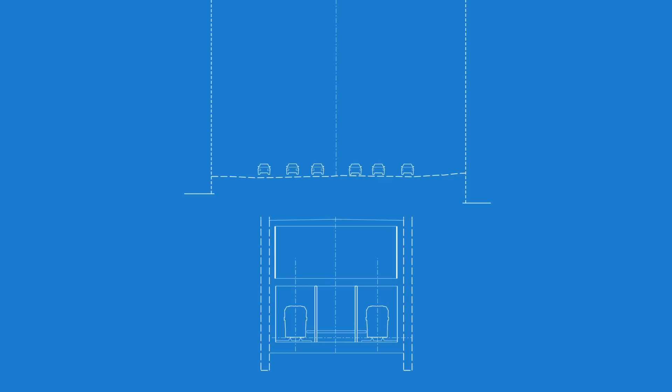When we build grade-separated rail in this city, Metro does essentially one thing: dual-bored tunnels with excavated stations multiple stories underground. They set these guidelines in the early to mid-80s, before I was even born, and they're still by and large using them today, with almost no deviation except where strictly necessary.

The problem is, this is a very expensive way to dig tunnels, and it's only getting more expensive. Meanwhile, there are two far, far cheaper ways to build grade-separated rail.

One, of course, is elevated, which we've occasionally built within dedicated right-of-ways, but can't seem to convince anyone in the city to let us build over streets, a continuing conundrum that I'll continue to discuss.

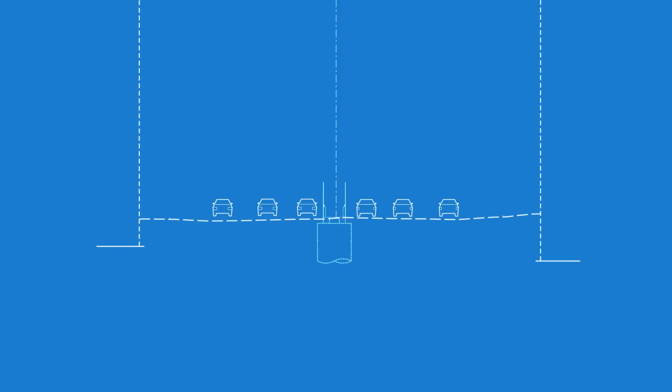But the other is cut and cover. Cut and cover is just what it sounds like. You dig out a tunnel and you cover it up. This is how basically all original subway lines were built. It creates a much shallower line, sometimes immediately below street level, and is absurdly cheap compared to our current methodology.

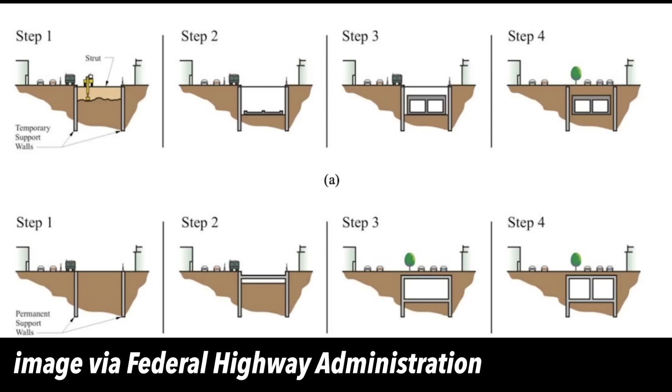So why don't we use it? I spoke to experts to get a better sense of things. There's three factors there. I think there's an institutional bias towards a high technology solution.

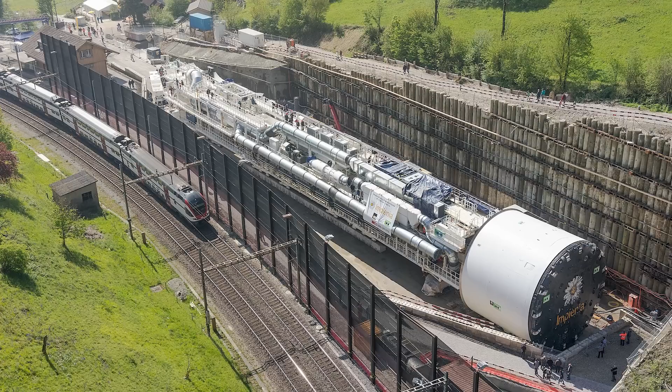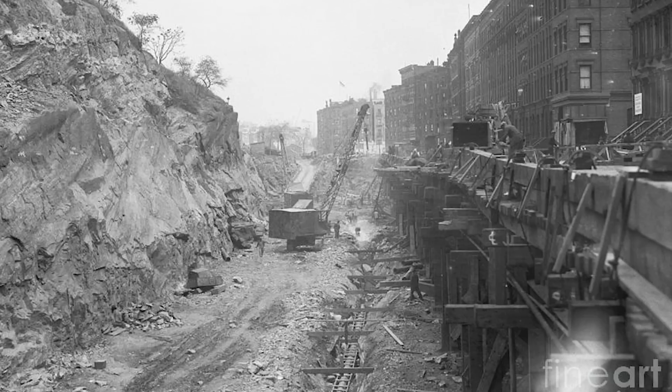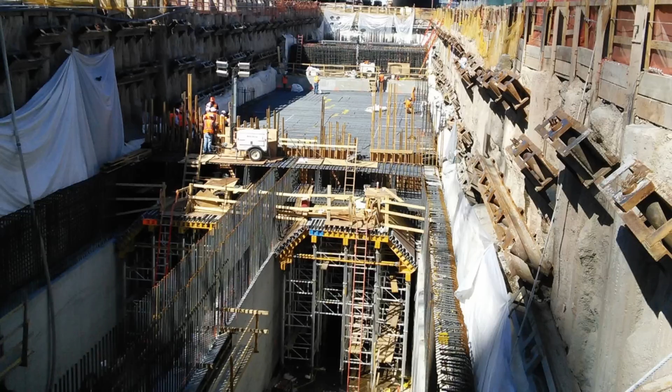TBMs are hugely impressive machines, and there's a bias against cut and cover as being the old technology. You get those photos when they were doing like the New York subway where it's chaos, and that isn't modern cut and cover. So there's a historical bias, and there's a lack of appetite of politicians to even broach the idea of disruption. That politics point is the really big reason.

Cut and cover requires closing the streets that you're digging under during construction, at least until it's excavated enough that you can deck over the tunnel and the street can be restored. And that leads to pissed off people.

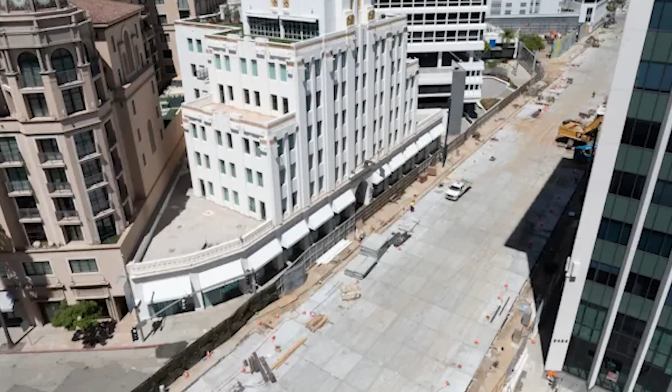It's also best on lines that entirely or mostly follow streets, as when you go off street, you need to acquire and knock down any structures it passes under to cut and cover the line.

This got me thinking about what current projects in Metro's list could be pushed as good proofs of concept that could finally convince Metro to shift from the old ways and embrace something new, or rather, even older, for the cost savings.

And well, we need to start with the mostly grade-separated projects, so the East San Fernando Valley Line and Southeast Gateway lines are out. The South Bay extension is on its own right-of-way and is already grade-separated cheaply with aerial and overcrossings.

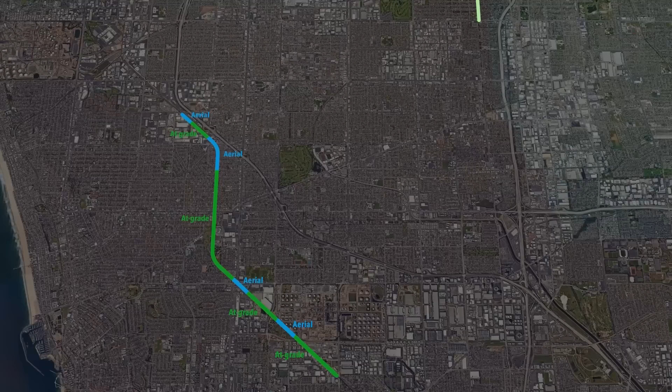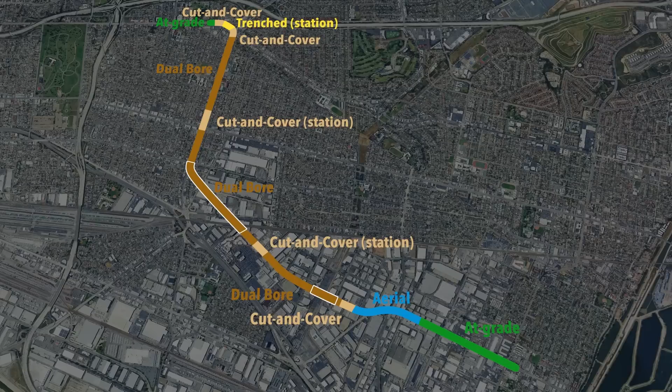The East Side extension, using the chosen route, kind of needs to travel off-street in two areas, and if you're launching a tunnel boring machine or TBM for those parts, you're left with a pretty small part of the route to alter.

Sepulveda, of course, should be elevated in the valley with Alternative 4, and that remains an ongoing battle.

Vermont Rail? Yeah, actually, that would be perfect for both cut and cover and elevated, north and south of Gage, respectively. Trouble is, this A isn't a Measure M project and thus is wholly unfunded.

And B, using one of the least wealthy parts of town as a test case for a slightly more disruptive technology understandably becomes untenable. So, what even remotely near-term projects are left?

Well, there is, of course, Crenshaw North. Phase 1 of the K Northern Extension makes sense to bore because it ideally goes off street grid for a while, saving a lot of time, even though Lafayette Square wants to reverse that.

But phases 2 and 3? It seemed crazy at first. There's multiple 90-degree turns that, as designed now, go under a lot of properties off street.

Phase 2 begins extremely deep under the D line, and then later has to be able to at least cross the B line if you want a future extension, and you're in an extremely busy and pretty wealthy area that will probably riot when it comes to street closures.

I should know, I live in this area. But that also kind of makes it perfect in a way. If we can do it here first, in a wealthy, dense area, that proves we can do it anywhere.

So I started futzing around, and I realized that logistically, not only was this actually not bad, it was actually pretty good. Even better, the impacts wouldn't be nearly as bad as I first expected. In most places, you can keep 2 travel lanes open in each direction on streets during almost all of construction. And as I dug into it more, pun mildly intended, I got more excited about it. Then I started researching and talking to experts to make sure I wasn't totally off my rocker. So here it is, my proposal.

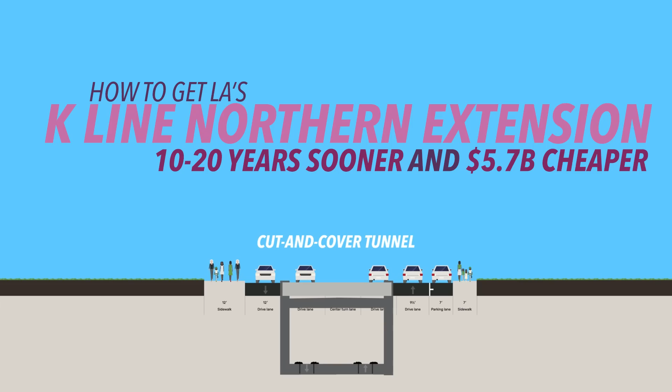Let's start at the end of phase 1. We have this extremely deep K-Line station under the D-Line's Wilshire-Fairfax station box. It adds a crossover at that depth, insanely expensive, but it would be necessary at the end of a phase, along with boring tail tracks at the end so the trains can use that crossover.

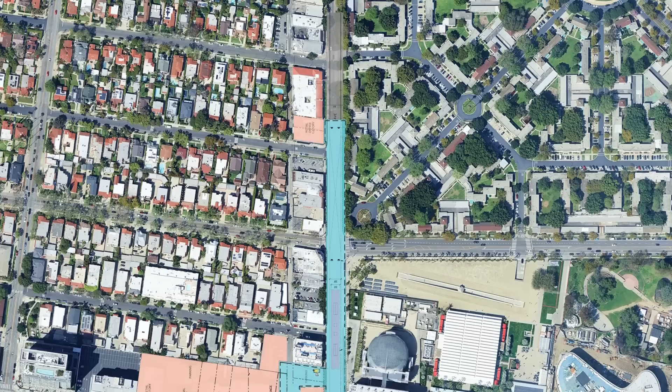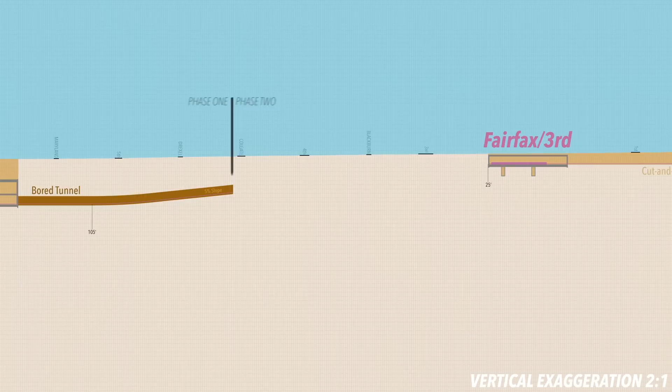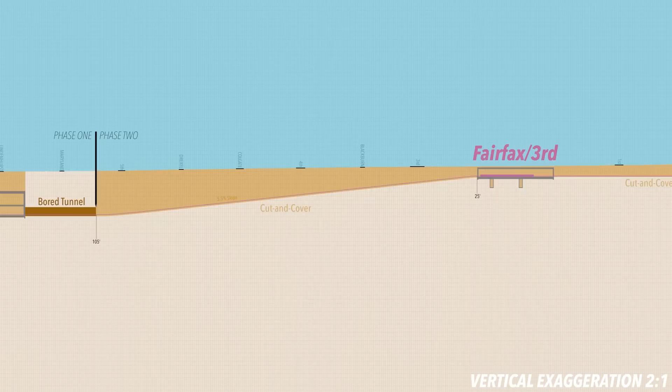So we begin with the need to bring these tracks from about 105 feet depth to something like 25 feet depth. There are two ways to do this. One, you can extend the end of phase 1 to 3rd Street and bore the tunnels up until we're near the surface, extracting the tunnel boring machines on the Whole Foods site that Metro is already planning to acquire for staging. Or you can end phase 1 at the tail tracks and construct the slope via cut and cover. We're already doing a giant cut and cover at the site for Wilshire-Fairfax Station at a greater width, so it's extremely feasible. The question is only which is cheaper.

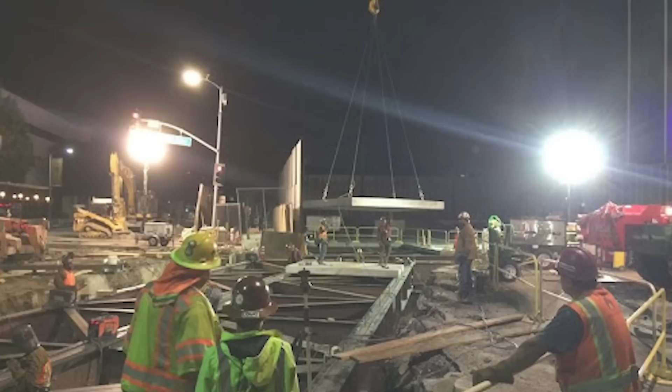The upside with cut and cover the whole way is I don't think you'd actually need the Whole Foods site at all. The reason Metro has it in their EIR as an acquisition is because of staging, and boring requires much larger staging areas than cut and cover, which leads to one of the first major cost reduction areas: you don't need to acquire these massive, insanely expensive properties for staging and TBM launch or extraction. So because of this, I'm assuming cut and cover all the way would be cheaper.

But either way, I'm siting the Fairfax 3rd station further north than the EIR does for 3 reasons. One, it allows more space to gently slope the tracks upward since we're ending at a shallower depth. Two, you'll see momentarily that the wider curve in the EIR's version, combined with its crossover, is what restricts it from moving further north, and our curve will start later, with the crossover frankly optional. And three, it will provide easier access to the forthcoming Television City development on the corner of Fairfax and Beverly.

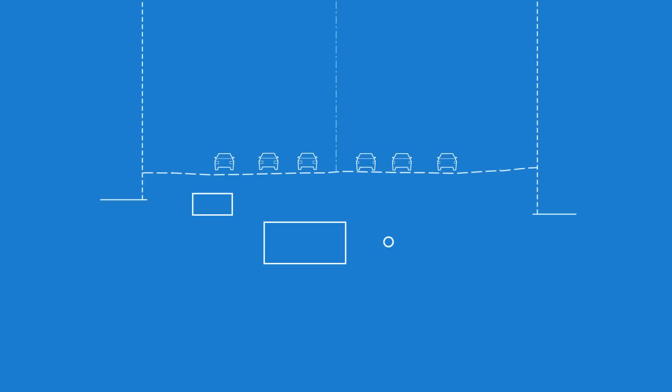So with that in mind, let's look at my potential station plan. I am keeping this as shallow as possible, a single level beneath the street, to make it as cheap as possible, meaning side platform stations. Yes, despite needing more utility relocation, it's still much cheaper than what we'd spend boring the tunnels, and it is very feasible. You do not need mezzanines. We use mezzanines in America uniquely to a high degree, and our fixation on mezzanines hugely increases costs.

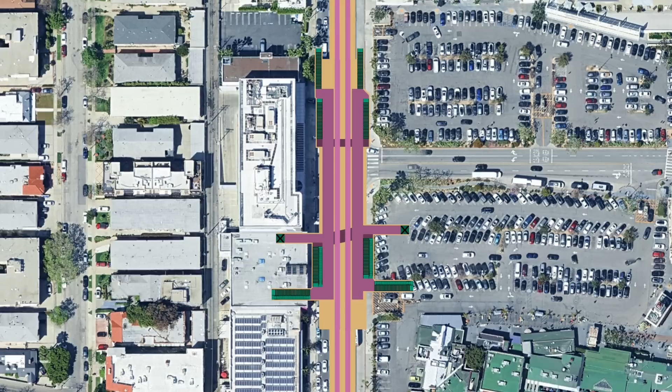While avoiding mezzanines, we do of course still want cross-platform access, and step-free access at that, within the station without needing to cross the road above. So each station will also have 1 or 2 small passages below the tracks to facilitate that, meaning we're only digging further than one level in these tiny areas rather than the whole area. Side platforms also mean, to make sure you don't have to use those cross passages going down and up again to access one platform, you at least want one entrance on either side of the street.

So in this case, I'm taking one extra property to enable that, and having the other main entrance at the farmer's market parking lot, which was already an option in the EIR version.

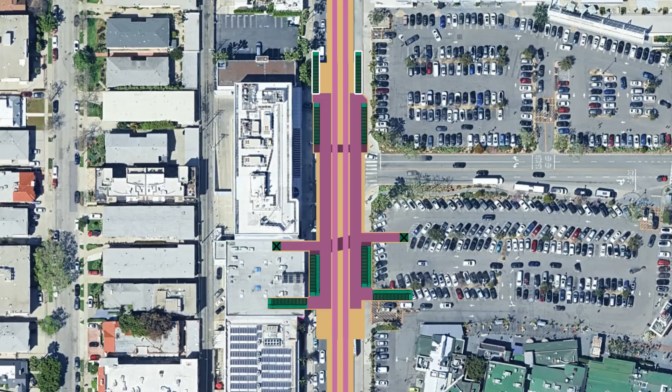These 2 elevators stop at surface level, platform level, and cross passage level, allowing full step-free access at each. I also have 2 further revenue entrances to the north to help facilitate Television City access. These are single stair entrances only, and the current turn lanes on Fairfax will simply be shortened.

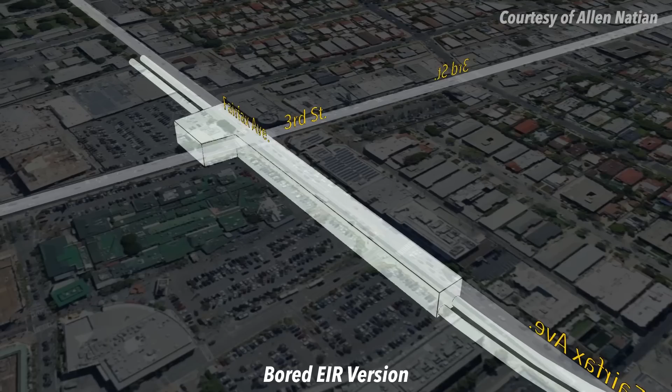And it's here that I want to discuss just how much simpler this is to build than the EIR version. Look at these respective 3D models of the station. Even with bored tunnels, the stations are built cut and cover, and there's 8 times the volume to excavate in

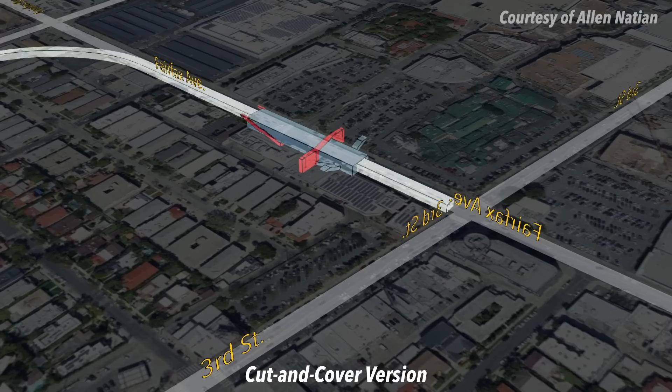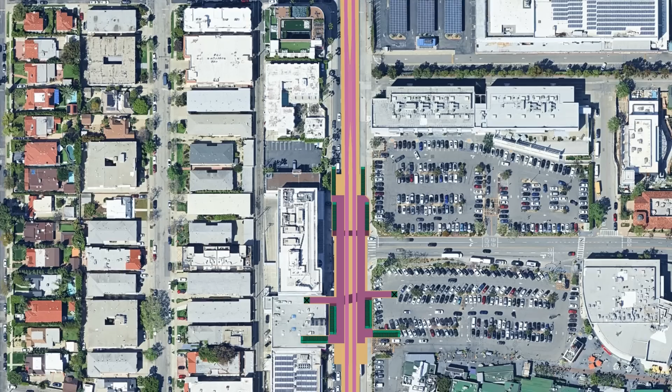the EIR version than in our cut and cover version. 8 times. So impact-wise, this street will be disrupted for significantly less time in our cut and cover version than the EIR version. Further, crossovers don't need their own station box extensions spanning the width of the street like they do in the EIR's deep bore version, and they can be added almost anywhere in the tunnels, further massively reducing surface disruption. But what about those tunnels?

The main downside of cut and cover politically is the street disruption outside of the station areas. Well, our roads in LA tend to be pretty wide.

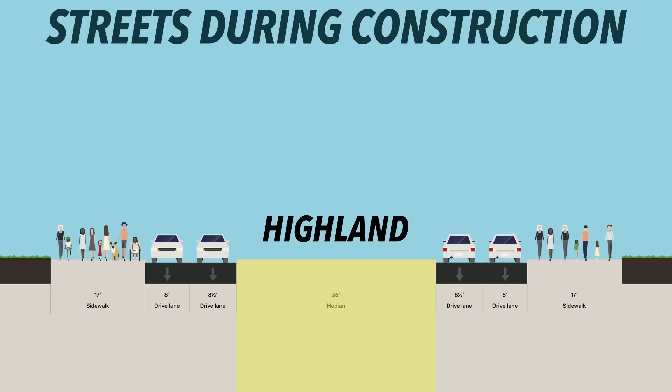If we take some examples of the various streets we'll be tunneling under, you can see that the tunnels, prior to the point when they'll be decked and the street can be restored, which, because of their shallowness, would happen much faster than the current excavations on, say, Wilshire, only require taking up a relatively small amount of space in the median. In almost every area we'll be tunneling, you can keep 2 lanes open in each direction throughout construction, and maintain all bike lanes and sidewalks and even some parking.

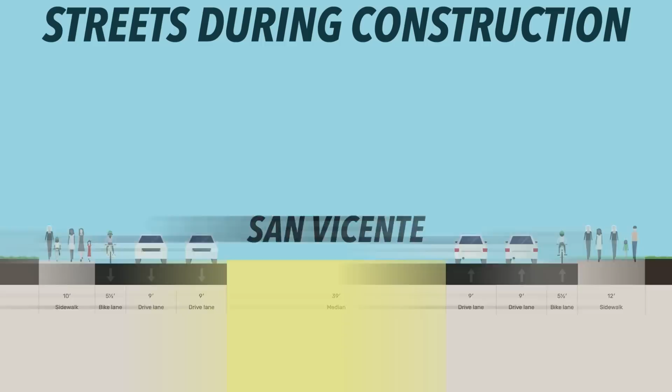The only exceptions are part of Fairfax and part of Santa Monica, where it would be 1 lane in each direction.

Add in compensation to the businesses along the way, a pittance compared to the money we'll be saving, and the disruption isn't in the same universe as old-style cut and cover, where you needed to close the whole street.

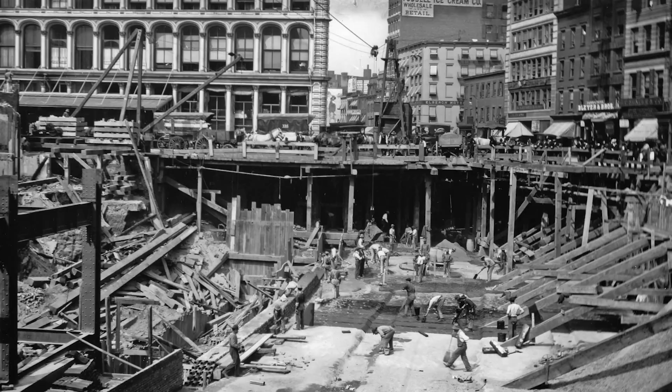And to really put it into perspective, even though we're excavating along the whole line now, we're still excavating not only less, but far less than in the bored version, because of the shallowness of the tunnels and the stations. The station excavation areas for a deep bore design comprise more volume than the entirety of the tunnels and station areas for the cut and cover version.

So yes, as weird as it sounds, with a cut and cover line, you're actually cutting and covering less than with a deep bore line.

And there's even a benefit I hadn't thought of. One of the most overlooked benefits of cut and cover is you're basically just doing utility relocation, excavation, and foundation pouring. That's something that a lot of contractors can do.

And so what you're able to do is you can really competitively bid out cut and cover work, and you can complete it concurrently instead of sequentially. That's something I didn't even think about, like the fact that the work is significantly less specialized. Yeah, you can really parcel out the contracts a lot smaller. The more simple the building method and the smaller you can procure those contracts, the more competitive the procurements get.

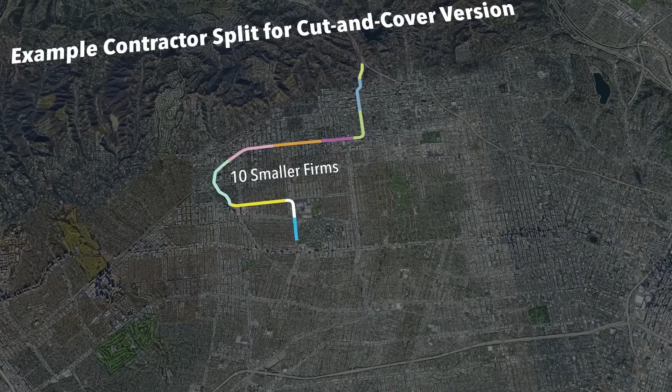That contractor point is huge. We can finally have meaningful competition for contracts again, and split the contracts into smaller portions. So if one contractor is dropping the ball, which happens kind of a lot, it doesn't torpedo the whole schedule.

In fact, because we no longer have the need to build tunnels sequentially, we have a lot more flexibility when it comes to where and when we dig, meaning we can optimize for speed, cost, or minimal disruptions as desired. All in all, the disruptions are well within acceptable limits, especially when you factor in the benefits to the area once the line actually opens, and the fact that in restoring streetscapes, we can add street improvements as well.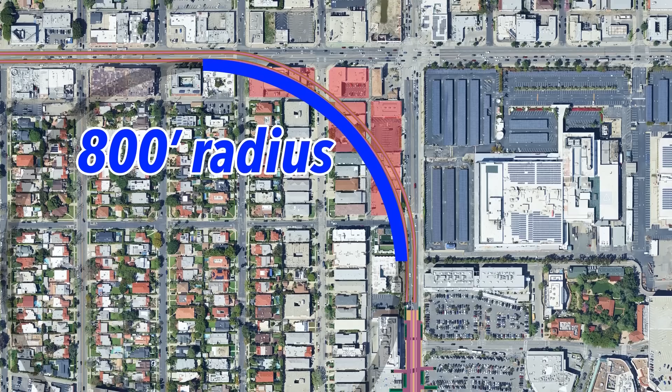Let's continue north. The 800-foot curve in the EIR version will need to be shortened so we don't have to take all of these properties to dig the tunnel out here. But if we reduce the radius to 520 feet, truly not a big deal in terms of speed reduction, especially as it's near a station where the train needs to slow down anyway, we can reduce the properties required to just these 3. A bank, a gas station, and a small retail building.

All told, relatively inexpensive when compared to something like that Whole Foods acquisition. And they're in a prime spot for a metro-led mixed-use development that can earn a lot of money back. Continuing on down Beverly, where we can keep 2 lanes open in each direction throughout construction, we get to Beverly La Cienega Station.

I believe we no longer need these 3 properties, saving more money, and in return would only need a small slice of this parking lot.

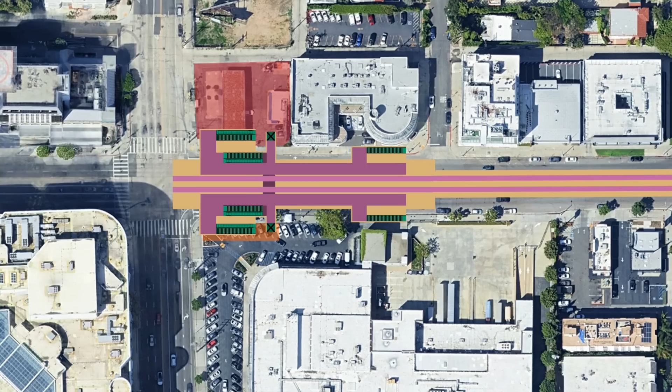Here we have a simple station with the main entrances at the west and emergency-only exits emptying out under the sidewalks to the east. We'll then turn onto San Vicente and follow its curves, or if preferred, we could straighten it out if we didn't mind the expense of acquiring these properties.

Either way, we turn onto the already planned acquisition of the Sheriff's Department for the San Vicente station, keeping it entirely off-street for minimal disruption and removing the need to acquire this property here.

Because this is under acquired land and not the street, this could be either a center or a side platform. Center's simpler, you just need to widen the space between the tracks on either side, so it would depend on how that trade-off pans out.

Either way, you can easily have revenue entrances to the north and south. Worth mentioning that under San Vicente, you can keep 2 travel lanes in each direction and the bike lanes in each direction, and do the same on this upcoming section of Santa Monica.

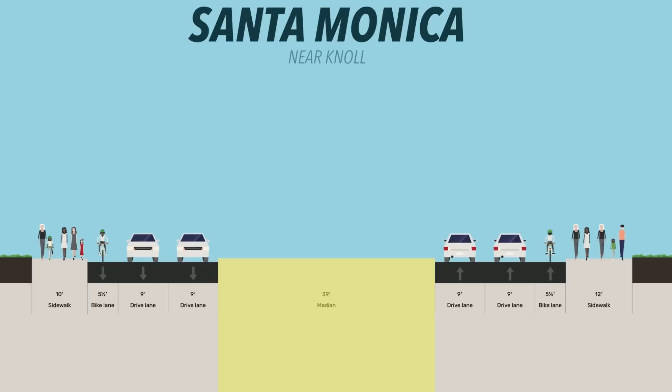Also worth noting, none of the curves here or anywhere on the cut and cover version are tighter than 400 feet radii. As a comparison, the E and A lines have some slow curves that are closer to 200-foot radii.

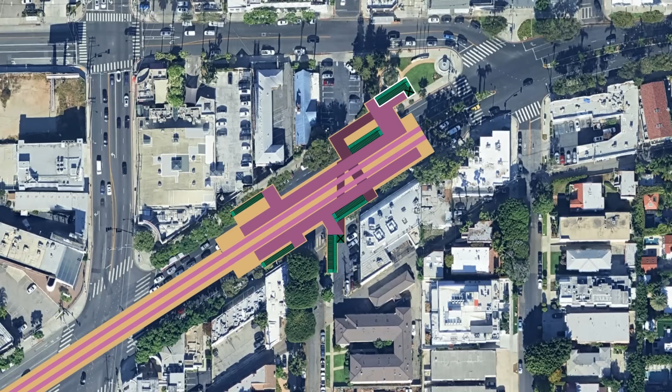Next, we come to another huge benefit for WeHo. The cost savings could allow us to add back in the Santa Monica La Cienega station that got axed early on. With one of our 2 revenue entrances at the park, the only property required here would be this small parking lot, with the western exits being emergency only.

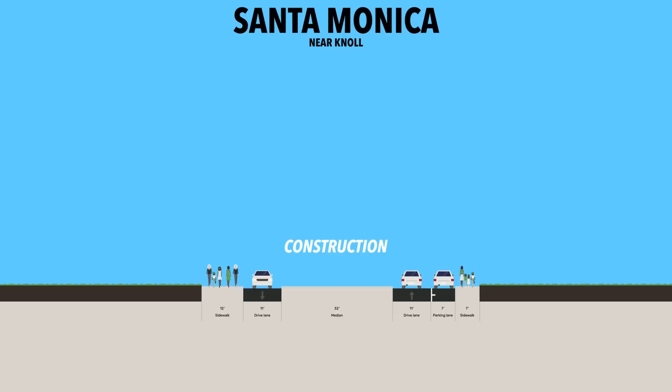Under the narrow section of Santa Monica, we get to the heaviest car impacts, down to one lane in each direction during peak construction, but businesses can be mollified by retaining parking. And again, that closure won't last nearly as long as it would for our current D-line station construction road closures, due to the narrowness and shallowness of the tunnels.

Here, in any given slice of the tunnel, you're excavating less than a sixth of the area of one of those deep bore stations, and can put on that decking that allows for full street restoration much faster.

Santa Monica Fairfax would require the same buildings that one of the options does, but not the entire massive Whole Foods complex that the other option does. Man, the EIR really hates Whole Foods on Fairfax, doesn't it?

It instead would just need a tiny slice of the Whole Foods parking lot. Again, here we have our main revenue entrances on one side of the station and emergency-only exits onto sidewalks on the other side. Although, if the width of the sidewalks is enough adjacent to those entrances, you could make them revenue entrances too. Not necessary, though.

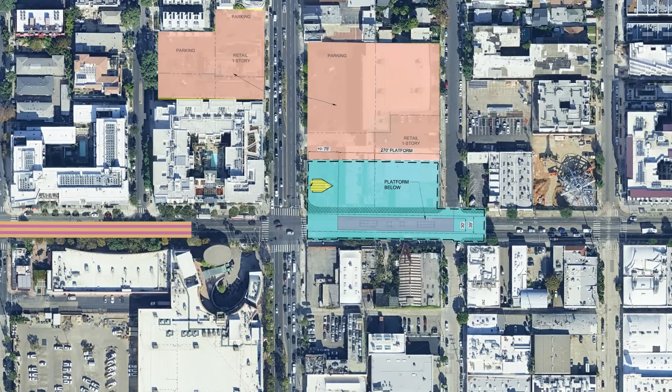Moving on to Santa Monica La Brea, here we see massive cost savings. All of these properties are taken in the EIR for staging and TBM launch. In my version, though, all you need is this cheaper property here and one small part of the parking lot here. I also add second revenue entrances to the west side.

The northern one onto the westbound platform sits under the sidewalk and street and just requires a few street parking spaces. And the other one would need the retail center on the corner to play ball to cut it into the plaza, and there may be part of the parking garage under there, I'm not sure. But either way, it isn't necessary if not doable.

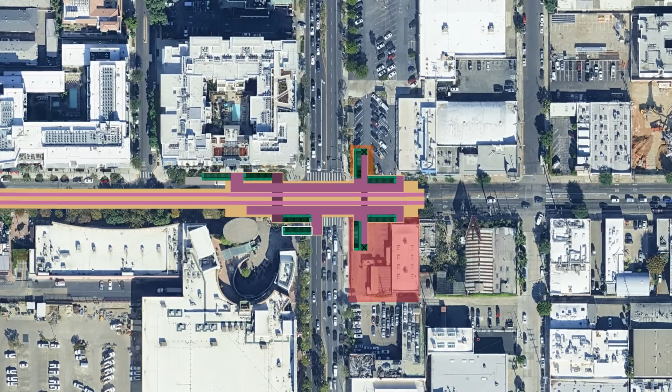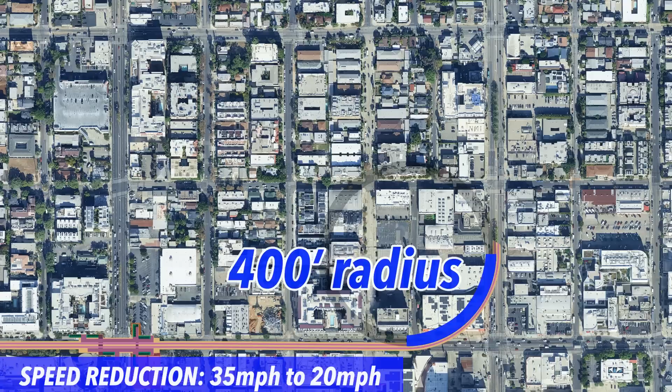Now we get to the biggest curve radius reduction, from a 1,000-foot radius curve onto Highland shortened to a 400-foot radius curve. This means the only required building here would be the public storage facility, which again represents another good redevelopment opportunity for Metro, as this area is really building up.

On Highland, continuing north, you can keep 2 lanes open in each direction during construction, and then we come to probably the most complicated section here, and the biggest constraint on building these 2 phases cut and cover: Hollywood and Highland Station.

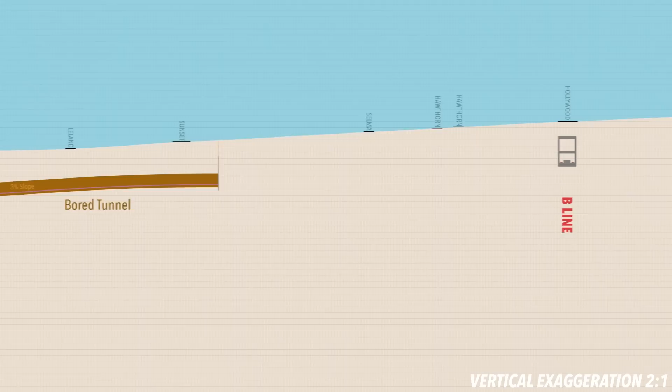So you can see the EIR has a comically massive station box, accommodating high-speed crossovers on each side, extremely deep, so it can pass beneath the Hollywood and Highland B-line station box, just as it does at Wilshire Fairfax with the D-line. This makes the volume that needs to be excavated insane.

I mean, seriously, insane. You also need all of these properties, or all of these in the second option, with the northernmost one being required for TBM extraction. Instead, this cut and cover version is predicated on the idea that we can actually build above the B-line station.

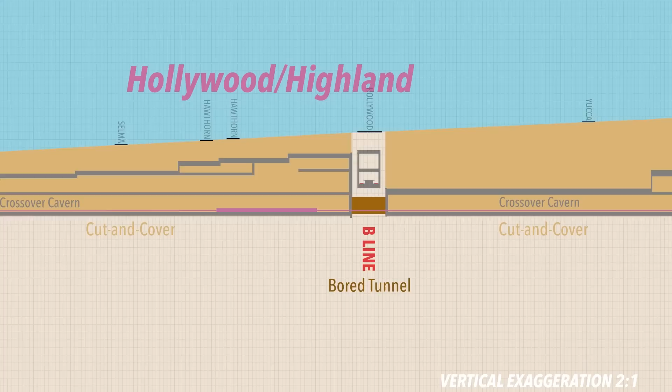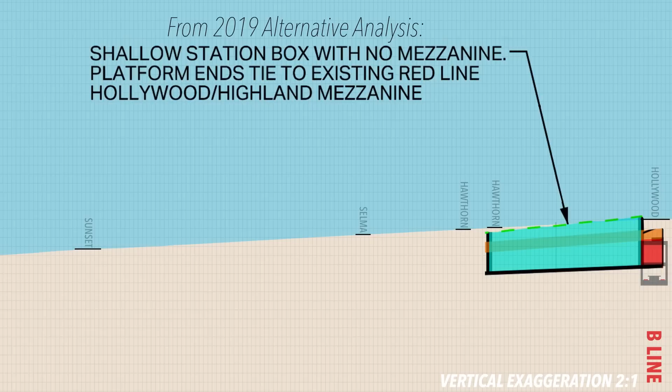Now, if you wanted to end the line here, you don't technically have to do this. In fact, early alternatives for the K-line northern extension did just that, emphatically stopping the line here with no possibility of extension, to not have to deal with crossing the B-line. And if that was the only way to construct this cut and cover, honestly, it might be worth it.

But thankfully, it's not. The B-line station box is about 24 feet underground at its shallowest point. That is just deep enough that you could thread the K-line over the B-line station box rather than under.

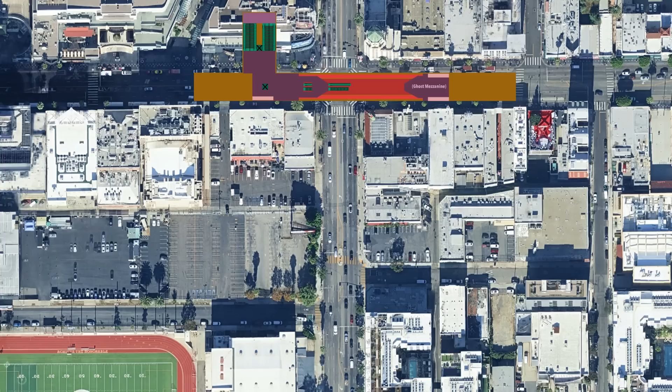Now, it would be way easier, due to the available parking lots for entrances and the existence of knockout panels on either side, to site the K-line wholly to the south of the B-line and only have the tracks need to cross above the B-line station box.

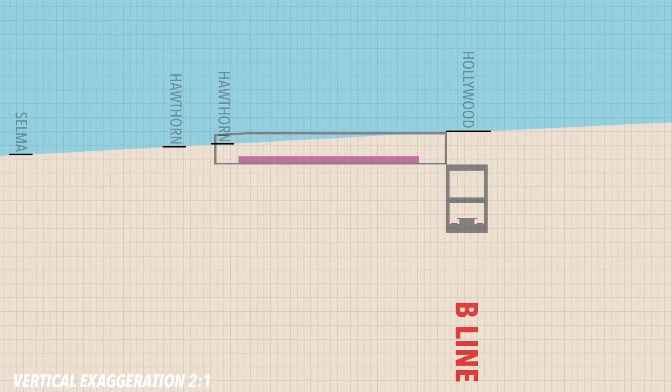Unfortunately, the ground slopes downward on that side, and you obviously can't build the station on a slope. So that means the K-line needs to be built mostly to the north of the B-line, with just a small bit peeking out to the south to access that knockout panel opposite of the current entrance.

I'm pretty sure to use these knockout panels, you need to take the adjacent properties, since they're basically at the edge of the street. So we'll leave the ghost mezzanine unused and just take this property, like the EIR requires, and build a second main entrance to the station on this side of the street.

That would leave just enough room under the sidewalk for vertical circulation up to the K-line northbound platform, with a passage built above the B-line station box here.

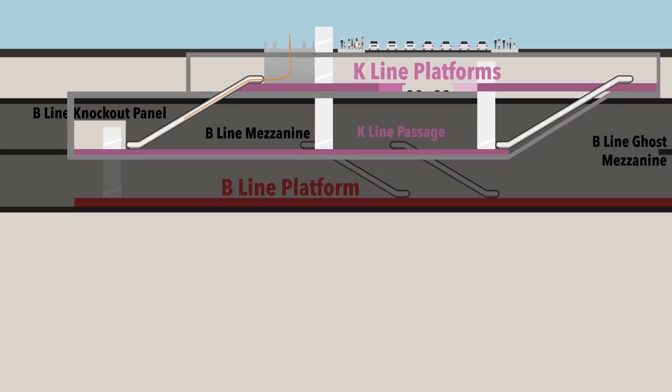Problem is, we still don't have direct access to the northbound platform from the street, requiring you to go down and up again. So we're going to take one further cheap property here, with an emergency-only exit opposite it alongside Ovation Hollywood on the sidewalk.

But this elevator and this elevator here exist to move passengers between platform and the cross passage/mezzanine levels, so there's still convenient step-free access to both platforms from each entrance without having to schlep all the way across the station.

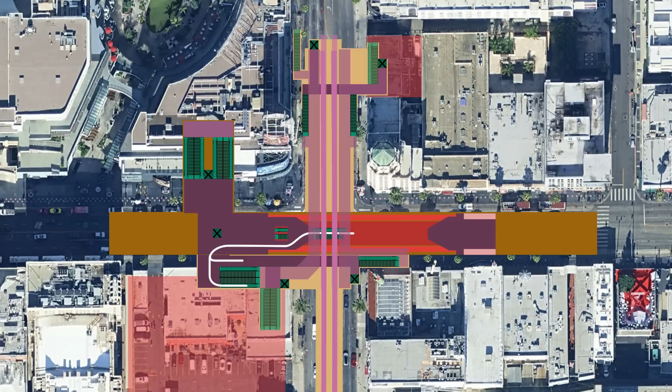These two elevators, meanwhile, will stop on the surface, K platform level, and the B mezzanine/cross passage level. Connections between the K and B lines can easily be made with these pathways. Meanwhile, we no longer need these 5 properties, again leading to a massive net reduction in properties required.

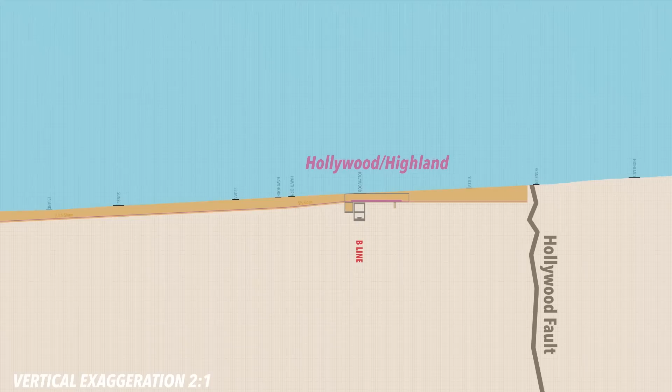Now, you could end the line here with tail tracks, like the EIR version will frankly have to, as a deep Hollywood Bowl station would require eye-poppingly expensive SEM construction that just wouldn't be cost-effective. But I think our cut-and-cover version could do it relatively inexpensively, as long as we're not encountering that hard rock that's causing problems at the shallow depths where we'll remain.

So we curve with Highland on 400-foot curves, remaining level at first as the street rises to allow for the required allowance for fault rupture displacement as we cross the Hollywood Fault. Then we rise with the street up to the Hollywood Bowl.

Now, there's an existing pedestrian tunnel here that connects to either side of Highland, as well as the bus yard in the middle that is heavily used during Bowl shows. We're going to conveniently make use of this tunnel and expand it.

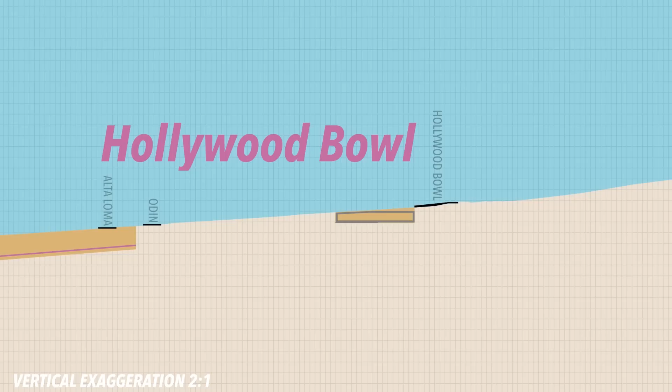Well, dig out and reconstruct it, really, as sort of a mezzanine level, because we want to have the end of the line here set up for the ability to one day be extended to the valley, which will have to happen with tunnel boring.

To cross the 101, it'll have to be deeper than its foundations, but that still would make the tracks considerably deeper than is ideal for the terminus here.

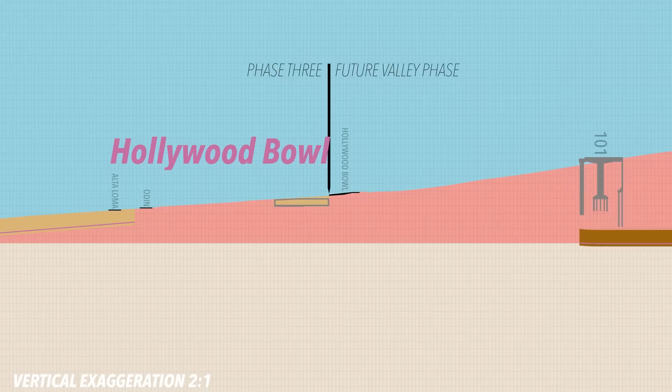But I think we can keep the tracks a little bit shallower and allow space for a TBM pit here at the end, after which the tracks in a future phase would immediately turn to follow under Highland so they can dive deeper before crossing the 101.

Meanwhile, our station, without tail tracks, will want to be designed similar to downtown Santa Monica, with 2 platforms and a pocket turnback track, and some sort of crossover on this end. I mean, I'm sure this one is messed up enough that any real engineer will scream, but that's not the point.

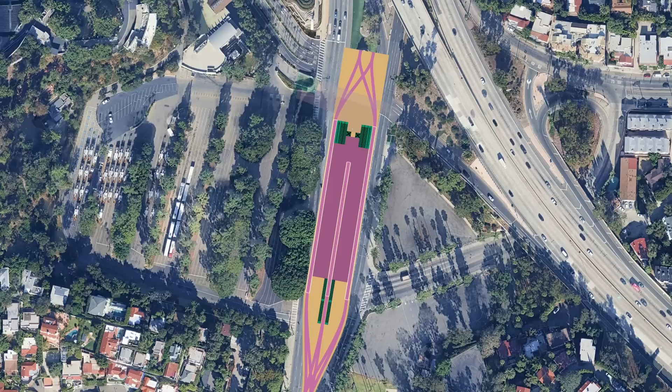In the future, only the 2 outside tracks would continue to the valley, allowing the pocket track to still function as a turnback track if you want to run double frequency south of here for events or any other reason. And having 2 full-size platforms will accommodate the crush capacity that will be required for events.

And keeping this pocket track terminated here allows for platform-level circulation between the 2, and using an expanded passage with added step-free access and escalator access here, as the station entrance/mezzanine allows for a single point of access to both platforms and to the bus yard overhead, moving the current staircase to over here and adding an escalator and elevator access.

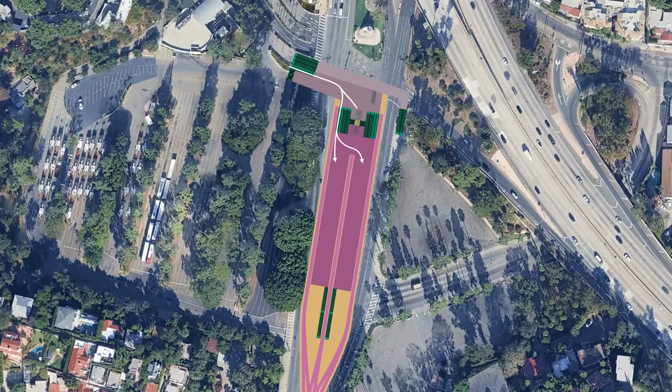So we achieve a Bowl station that can A, operate effectively as a terminus, B, easily allow for a future extension, and C, accommodate event crush capacity, a full 70 feet shallower, not to mention considerably shorter, than the SEM constructed station in the EIR, a depth where hopefully the rock is much less of an issue.

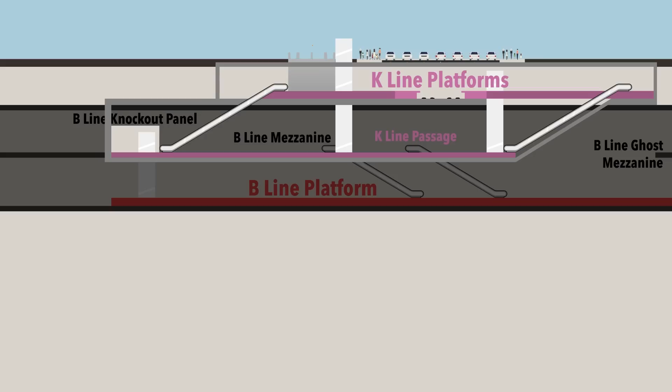You can see that we've barely touched the overall alignment at all, besides adding tighter curves and adding back the possibility of 2 more stations at Santa Monica/La Cienega and the Bowl. And any travel time costs caused by the speed reductions there would be paid back in full by the fact that riders would only need to descend a single level to reach the platforms at all stations except for the Bowl, massively reducing the time spent on stairs, escalators, or elevators to reach the platforms in the bored EIR version of the line.

Now, let's talk cost. Phases 2 and 3 in the EIR, using bored tunnels and absent stations at the Bowl and Santa Monica/La Cienega, are coming in at $10.14 billion, or an eye-popping $1.72 billion per mile, including stations. According to Alon Levy, the most recent example of modern cut-and-cover construction is Paris's Line 13, which came in at around $209 million per mile in 2021 dollars.

In 2025 dollars, that rounds up close to $250 million, and let's literally triple that amount because, American transit construction, to $750 million per mile, and assume that that would be a pretty reasonable assumption of where this would land. That leaves us with a total cost, excluding the Bowl and Santa Monica/La Cienega, of $4.44 billion for phases 2 and 3, only 43.7% of the current price, and saving a whopping $5.7 billion.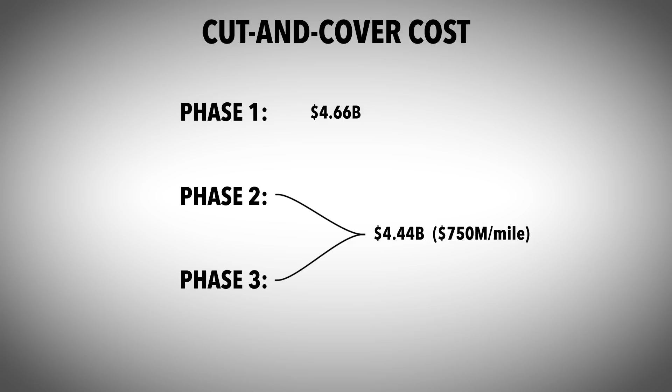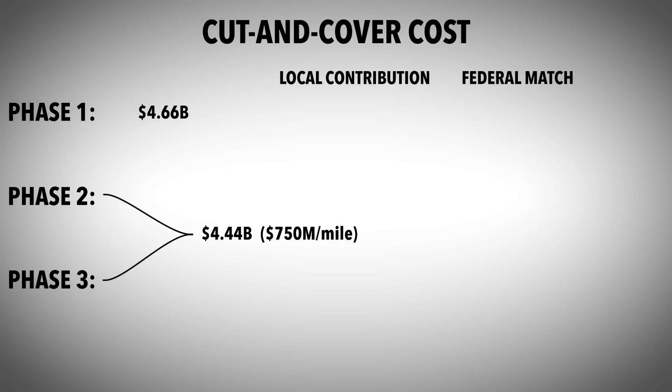You know what those cost savings would allow? Well, let's go back to my chart from the previous K Line video on the costs of the line, along with what Measure M provides starting in 2041, and what the EIFD study suggested that the EIFDs from WeHo and LA City and County would be able to raise to accelerate it. Now, we're still going to assume federal matching dollars would come in because this would be post-2028, and I'm not ready to write off the country just yet.

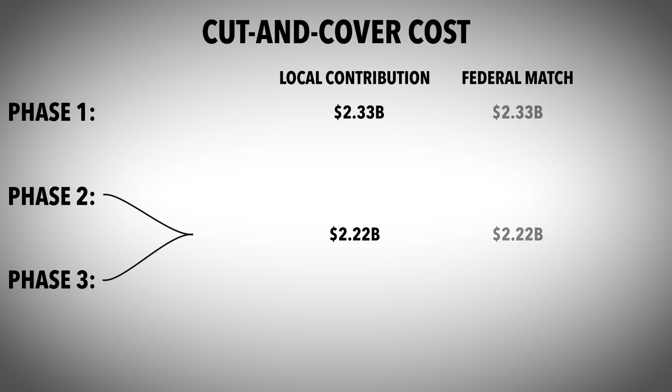And massively reduced costs without reducing ridership would make this insanely cost-effective and as competitive as it could be for any available federal grants. Even if we assume Phase 1 stays the same cost, and it can get much cheaper by eliminating the unnecessary crossovers at Midtown Crossing and Crenshaw/Adams, it eats up $2.33 billion of LA County and City EIFD money to be able to provide that local half of the cost entirely without the Measure M money and start sooner.

Meanwhile, Phases 2 and 3 considered together now cost so much less that the only local contribution necessary would be $2.22 billion instead of $5.07 billion. You know how much they said a WeHo EIFD would bring in? $2.2 billion. And you still have leftover LA City and County EIFD money to use as well. And you know how much Measure M has slated for K North starting in 2041? $2.23 billion. Well, isn't that just about the most convenient thing there is?

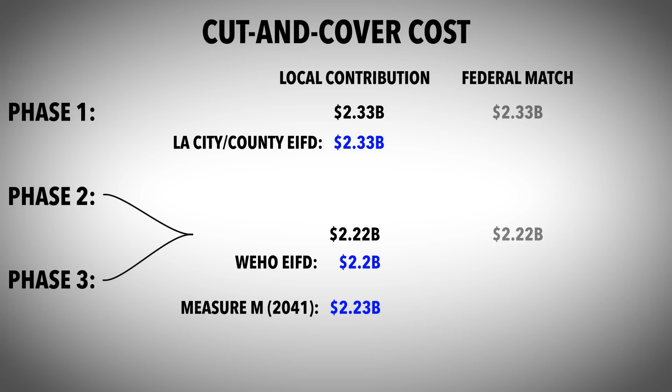You can literally divorce the entire project from Measure M's schedule, building it as quickly as you can get shovels into the ground, and even use the Measure M funds to entirely pay back WeHo in 2041, or partly to fund the additional Bowl and Santa Monica/La Cienega stations that would still be way cheaper than that.

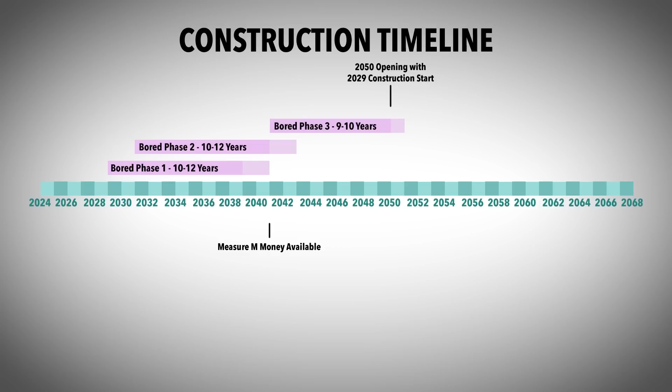We could even afford to add in relatively cheap junction boxes that would allow us to keep the Santa Monica line dream alive. This takes us from a horrifically unaffordable project where we best case have to wait until 2050 for a complete opening of all phases, to one that could open entirely by 2040, hamstrung mainly by the 10 to 12 years that Phase 1 would take.

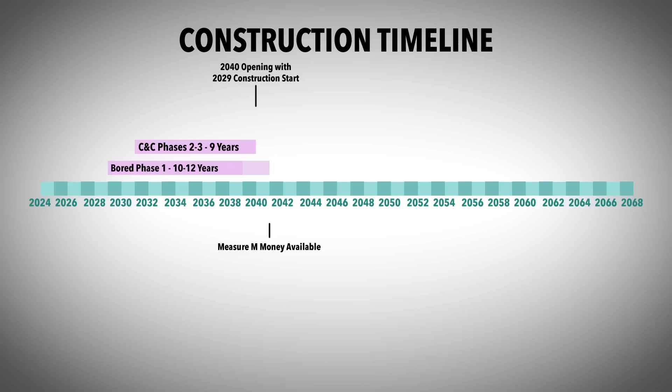Again, it takes much longer to construct the line as a deep bore than it would as cut and cover. There's plenty of time to redesign Phases 2 and 3 as cut and cover while moving on Phase 1 construction, and then starting 2 and 3 construction concurrently with Phase 1. I don't want to be hyperbolic, but this is literally the silver bullet to getting this line soon. The full line, in just 15 years rather than 25 best case or 35 years more likely.

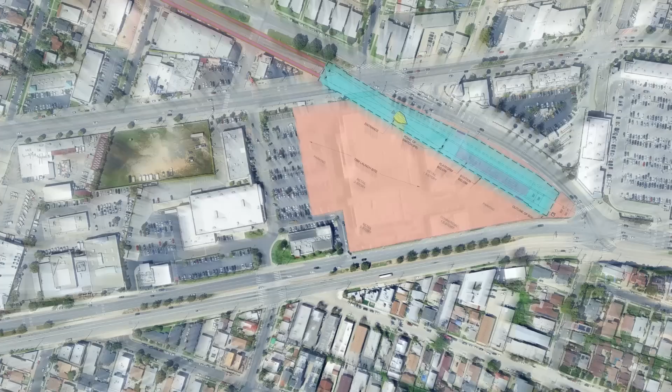And for the record, it might be possible to construct either half or all of Phase 1 cut and cover, though the northern and southern halves each have one big question mark, and this would slow the line down a bit more meaningfully. The upside is that the TBMs for Phase 1 are all launched from Midtown Crossing, 2 going north and 2 south, so eliminating either half eliminates a TBM launch and saves a lot of money.

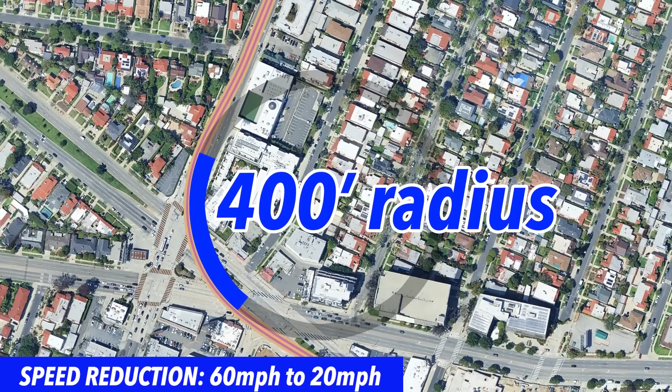For the northern half, the median of San Vicente is huge, seemingly ideal for cut and cover. The 2 limiting factors will be A, that you need to reduce the curve to Fairfax from 4,400 and 3,000 foot curves to a 400 foot curve, an up to 11-fold decrease, and even then have to shift the line into the outer lanes to do it, making it travel a bit more of a circuitous route and adding some travel time to the line, and B, that you only have 20 feet of clearance above the D-line station box instead of the 24 feet with the B-line. Maybe that's possible, but it's threading the needle really thin, inches to spare if anything at all.

But if you could fit tracks over the D-line station box and don't mind a slightly longer ride, it would save gobs more money by not needing that second TBM launch at all, and not needing to dig so ridiculously deep for Wilshire Fairfax. And the time spent restudying it could be gained back in faster construction time. What about the southern half?

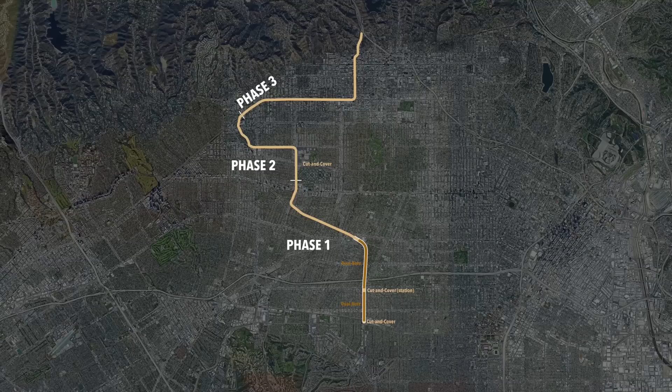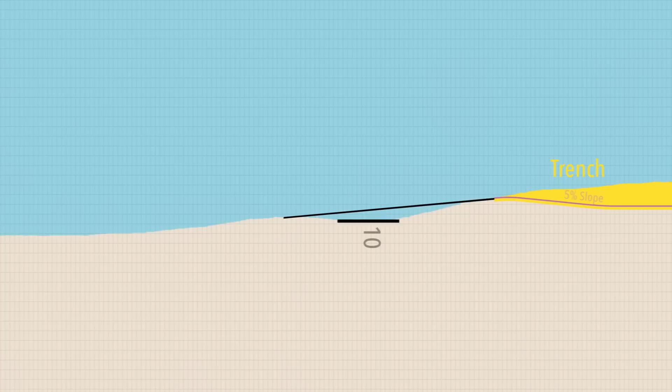I actually thought that you straight up couldn't do Phase 1 south of Midtown Crossing cut and cover at all because of the need to cross the 10. But actually, if you bring the tracks at grade to cross on the existing bridge, there is, if my math is right, just enough space on either end of the bridge with the way the ground slopes to get the tracks back to the Metro standard depth for cut and cover on a 5% grade before encroaching on the intersections.

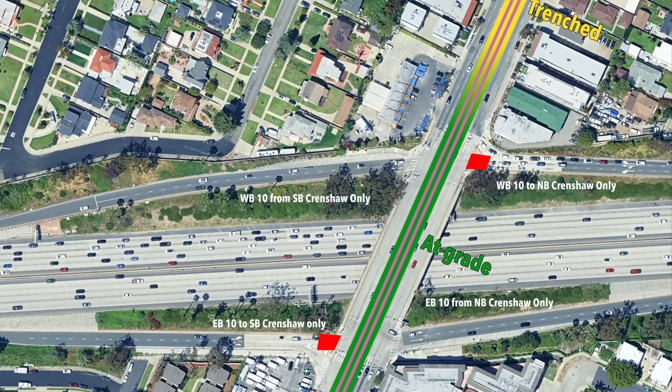There's enough room that you could keep 2 travel lanes open in each direction on Crenshaw, but you're restricting the ramps from being accessed by the opposite side of the road, so you're losing these possible travel paths in red, and you probably need to grab this property for a turn lane onto this ramp, and this one for turn lanes onto Adams. The feasibility question on this is whether the existing bridge is rated to carry light rail, or if it'd have to be torn down and rebuilt, which, over an active freeway, would not be cheap. And of course, you're again adding travel time by taking a much longer, less direct route, with the tightest turn of the whole line at 300-foot radius here.

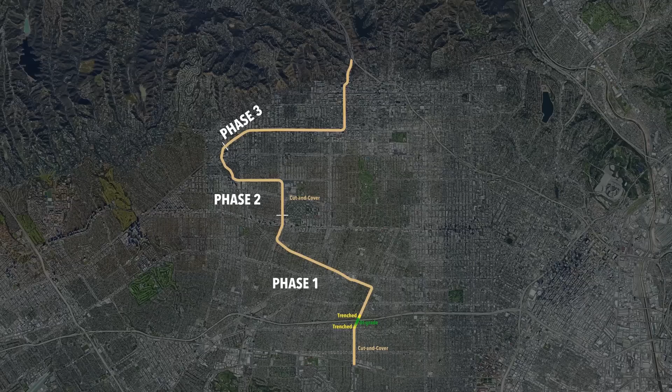And notably, you no longer go under Lafayette Square at all, though I actually consider that a negative, as there's no objective reason to not tunnel under residential areas, and we cannot let them make that a precedent, because that's insane. But if the bridge can hold the line unmodified, and the clearance over the D-line is enough, there's no longer any need to bore in the K-line northern extension, and you'd save roughly an additional $1.4 billion. But even if you can't do either part of Phase 1, Phases 2 and 3 are enough.

When it comes to pushback, I expect it to come from 3 places. First, from the handful of massive contractors that are currently the only entities able to deliver complex underground metro lines, as this would effectively remove our dependence on them for these phases and lose them a lot of premium work, while us taxpayers would have the benefit of much more competitive bids. 2, the usual crowd of NIMBYs that will lose their absolute shit at any suggestion of surface disruption for their cars.

But this will cause significantly less surface disruption at station areas, and the disruption elsewhere can be very effectively mitigated by keeping multiple lanes open during construction, along with some parking, and allowing for extremely reduced timelines due to the shallow depth of the line and the ability to restore streets once the decking is up.

And as I am directly in the affected area, I can at least be a voice to counter them, because I find those disruptions extremely worth it. And given how much WeHo wants this line, I think much of the area will agree with me. But there's also 3, Metro staff who would likely be very unwilling to open this whole can of worms and change the way they've been doing things forever.